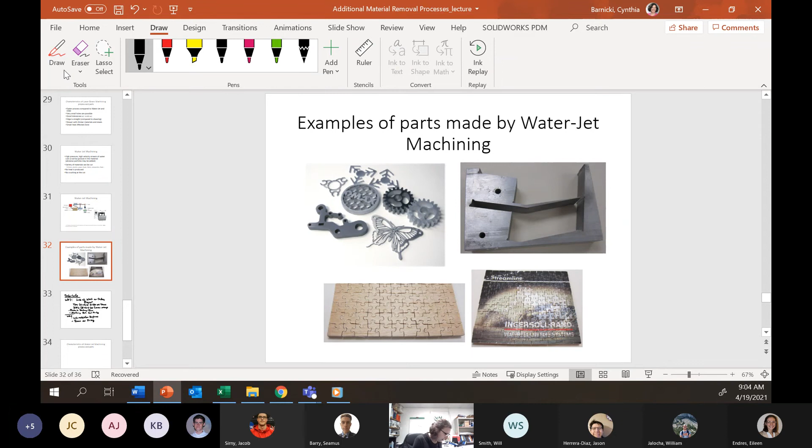So we're going to go back to our alternative machining or material removal processes. I did put the entire video that we're watching clips from into Canvas with the times that are useful; there are some other processes that you might find interesting as well.

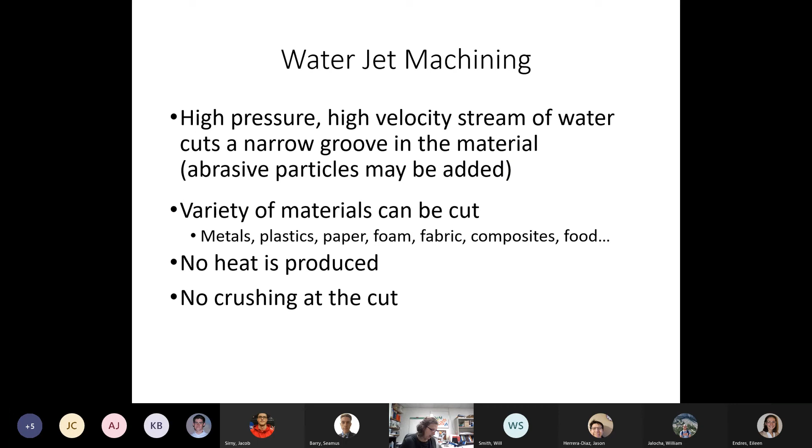On Friday, we were talking about water jet. In water jet, the machining and material removal is coming from a high pressure, high velocity stream of water. We talked about some of the advantages or characteristics and a little bit on the units themselves, and I think this is where we were when we finished on Friday.

Again, you can see that we have a lot of intricate parts possible. Here is a puzzle made of paper, and the velocity is high enough, the stream is tight enough, that you can actually do paper and cardboard in water jet without issue. So you can see how thin we have it.

I do want to introduce a new word, and that is kerf. When we talk about kerf, this basically is, in material removal, the thickness of material removed.

And sometimes we also refer to that as the material itself that's removed. So if there's a statement that says water jet has low kerf, what we're talking about is this material that ends up getting removed. So we might also say that rough milling has a large kerf. So kerf is something that we do tend to see in these material removal processes.

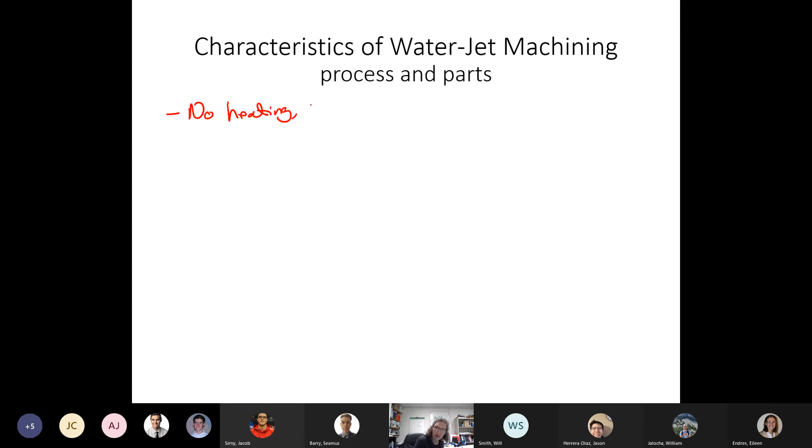But in terms of the overall characteristics of water jet machined parts, one of the big ones is no heating. So there is no heat affected zone. So we don't have to worry about any changes in material property due to heating.

Now, if we look at the surface roughness, we're in the 8 to 32 microinches. And I'm just going to note here, EDM and laser can do better. So water jet gives us a surface that is good compared to some others, but EDM and laser actually do a little bit of a better job than that.

And again, if we look at feed rate, this is going to be moderate on the feed rate. It is going to be faster than EDM and slower than laser. And sometimes in the video, we can pick up different feed rates. Any feed rate will depend on thickness and material. So our metals are going to be a slower feed rate, but water jet's on the moderate end.

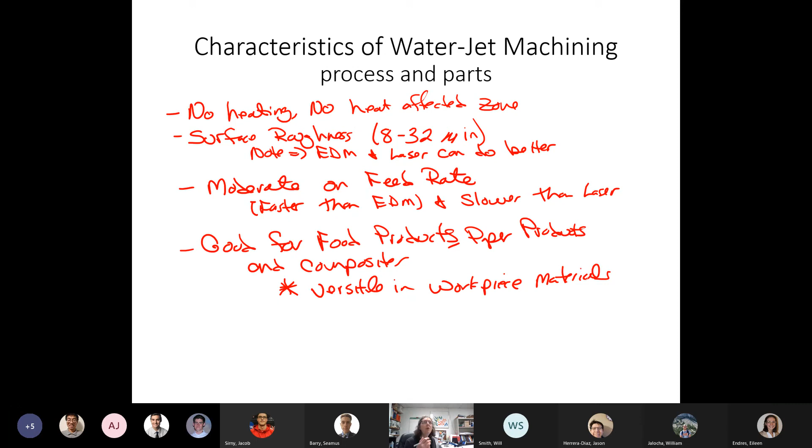And then in terms of the actual machine costs, the machine costs are fairly good here. We don't have dedicated tooling; it's computer controlled for the shape. And what this means is a single part is possible. And again, that makes it nice for custom parts.

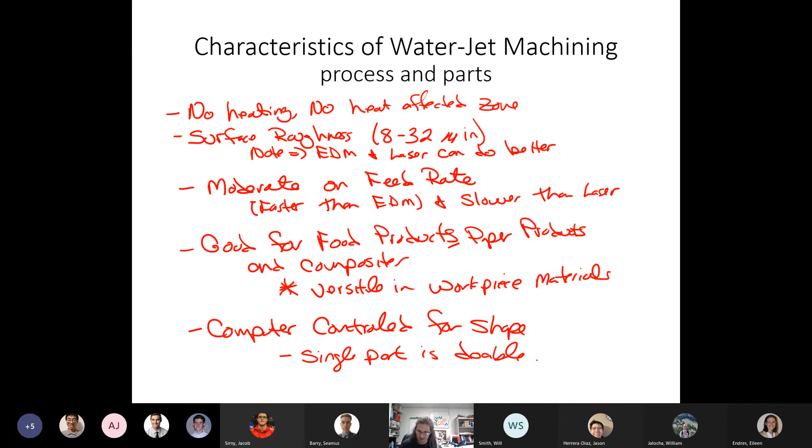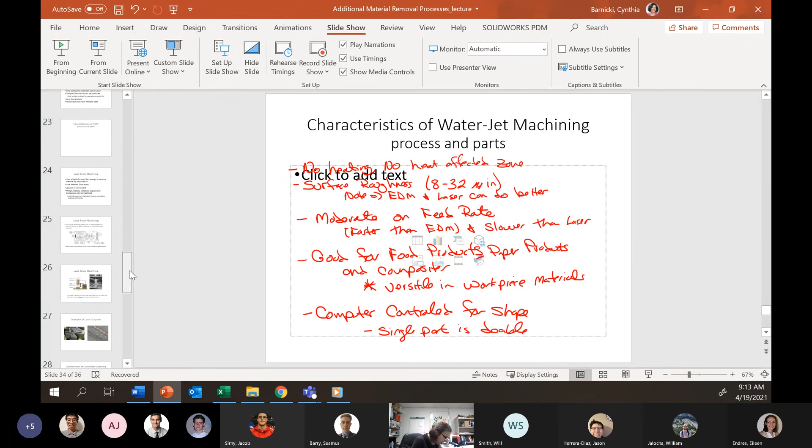Okay, that actually is what I wanted to talk about in terms of water jet. I am again going in the opposite direction of how I had set this up. On my notes, we're actually going backwards. So we're going to next talk about laser. And I want us to look a little bit at a video, but after we go through a few of the slides. Laser beam machining is probably one that has more market share. You're likely to encounter laser cutting or laser beam machining.

Really, I am not aware that there's a big difference between the terms laser beam machining, sometimes called LBM, or laser cutting. Again, a terminology issue here. Lasers are becoming more and more used. Now, we are going to use a highly focused light energy to remove material by vaporization. And oftentimes the CO2 laser is the common form.

Now, we are looking at thermal energy to remove the material. So we do have a heat affected zone. The size of the heat affected zone is very dependent on the size of the beam, so to speak, that's causing the vaporization and heating. So it is going to be small because we have a very concentrated energy, and generally it's not going to be there as long.

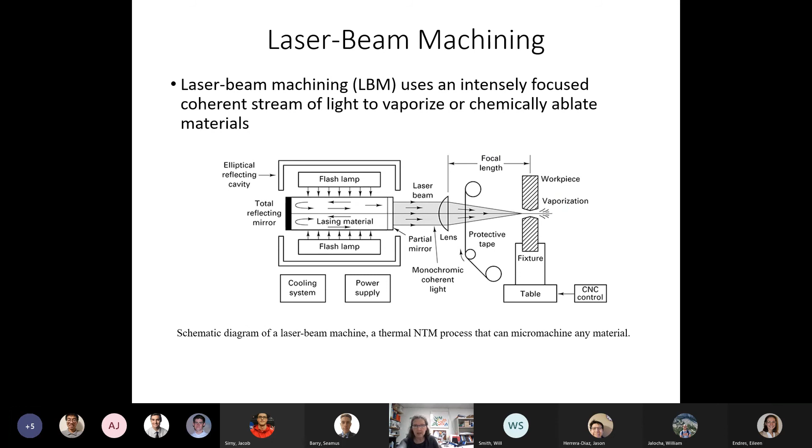Okay, again, we're just looking at we have our laser, we have our workpiece. We do have a little bit of distance between the tip of the laser and the workpiece. It is all CNC controlled. So again, we have that coherent stream of light to vaporize or just chemically ablate the material. Okay.

I am going to move to, let's look at a little bit of the video clip on this, and I am unsharing so that when I do go back and share, I can include the sound.

And we're going to see a little bit of the end of the water jet, but we will again look at laser, look at the materials, listen for anything about tolerance or anything about feed rates as well. So let's give laser a go.

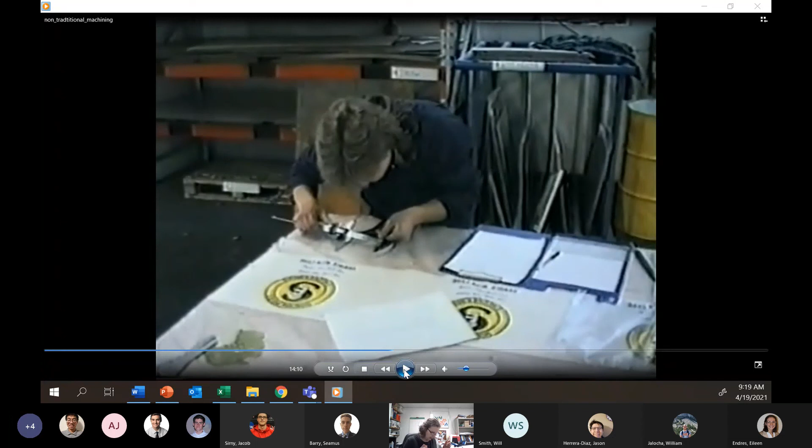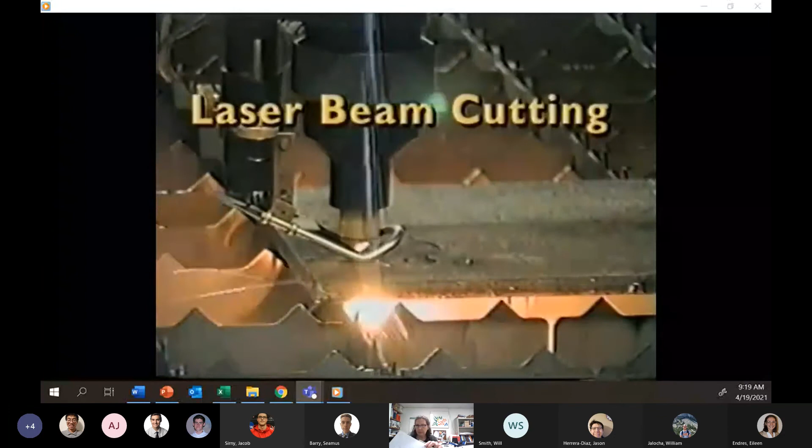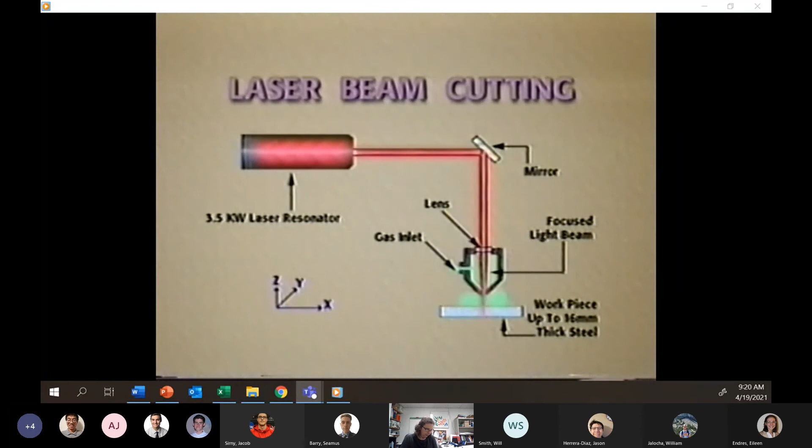And here we go. Tolerance on the spanner is plus or minus 0.2 of a millimeter, and the edges must be square. Laser generators have a capacity of 1 to 3.5 kilowatts, and this energy is focused on a spot having a diameter of 0.2 of a millimeter. A 2 kilowatt generator will cut 12 millimeters mild steel at 1100 millimeters per minute using oxygen as an assist gas. For cutting stainless steel and aluminium alloys, high pressure nitrogen is used. This is called clean cut. Non-metals use compressed air. Laser cutting allows a new flexibility in design, as shapes that were previously considered impossible can now be cut.

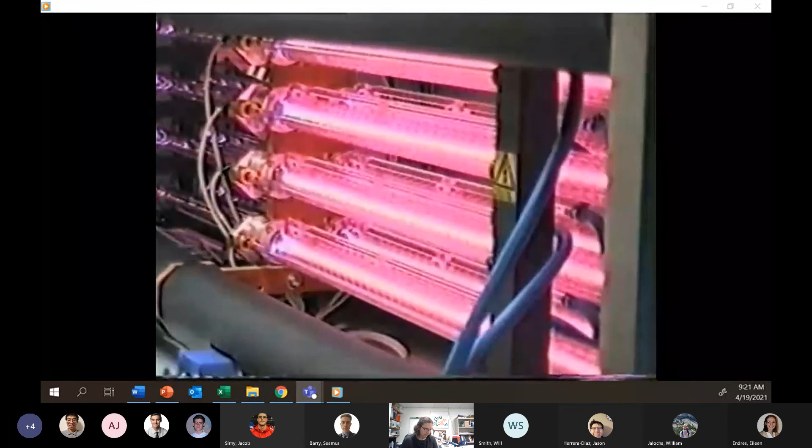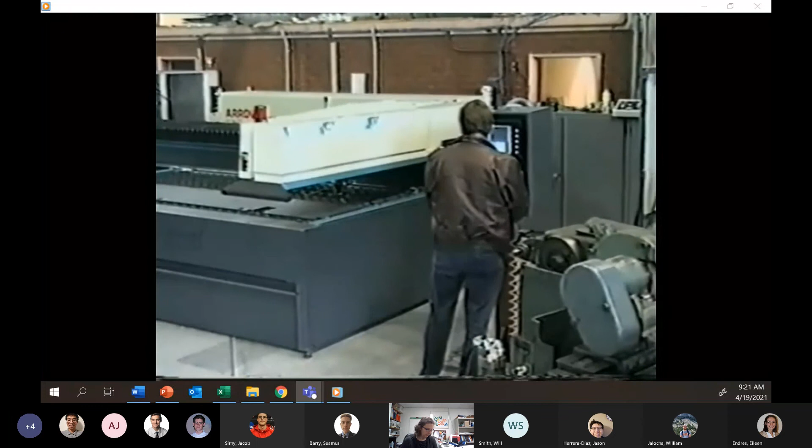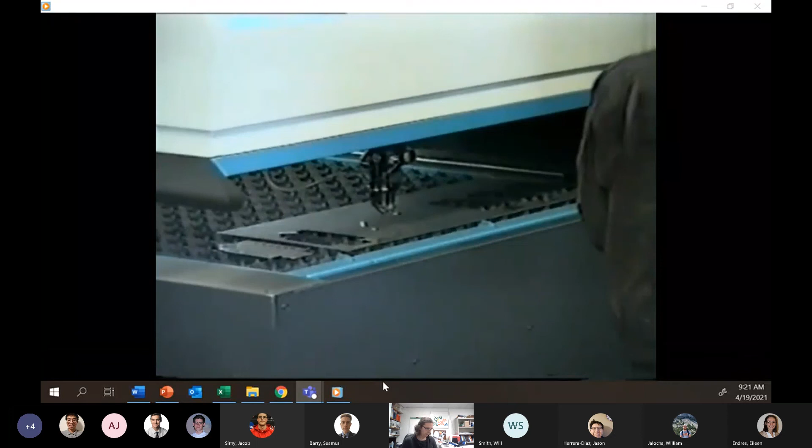This industrial CO2 3.5 kilowatt laser generator produces enough power to cut 2.5 millimeter stainless steel at a feed rate of 2 meters per minute. The laser beam from the generator is reflected via a series of mirrors to the cutting head. These mirrors must compensate for the cutting head movement, a very complicated task when 3D laser cutting is performed. The Laser Lab profile machine has two tables, 3 meters by 1.5 meters, that pass under and over each other, allowing one table to be unloaded and then reloaded, while material is being cut on the other table, giving an improvement in machine productivity of up to 50%.

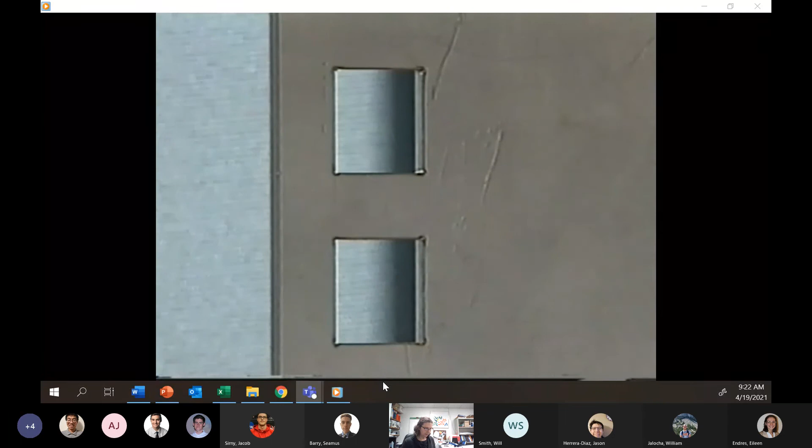With 2,500 kilopascals of high-pressure nitrogen, clean cut, tolerances of plus or minus 0.1 of a millimeter can easily be maintained over the shape. The cut width is less than 0.2 of a millimeter. The complete shape is cut out in 1 minute 38 seconds. The edges are clean, square and smooth. This process is ideal for medium-sized production runs where the cost of a die set would be prohibitive. It is also perfectly suited for just-in-time requirements, where small batch sizes are required, as changes from one material to another can be accomplished within 1 to 2 minutes.

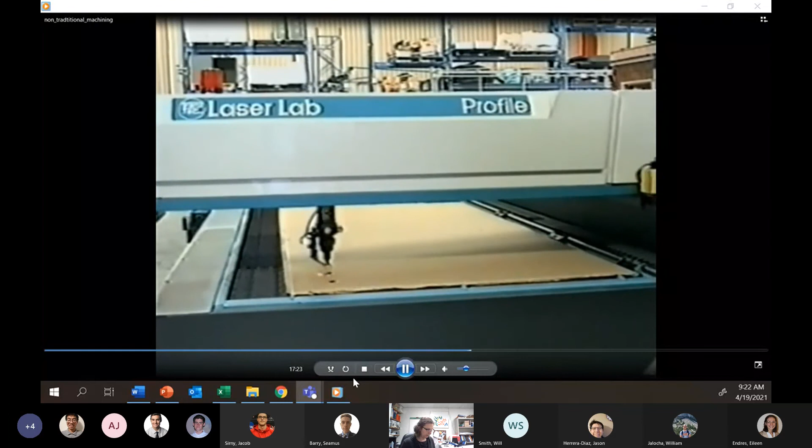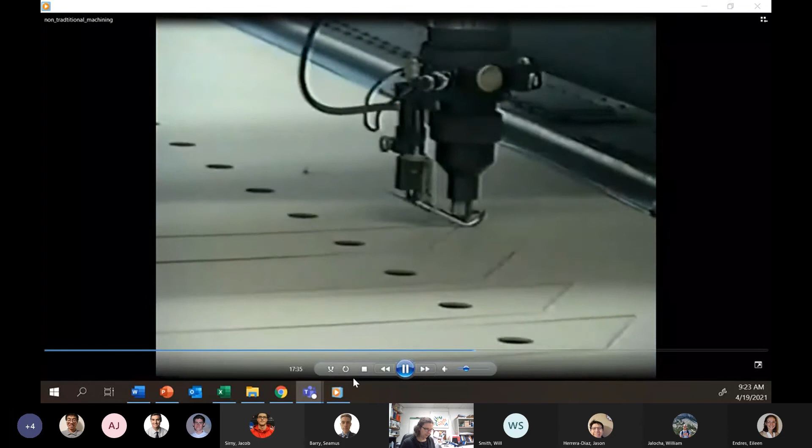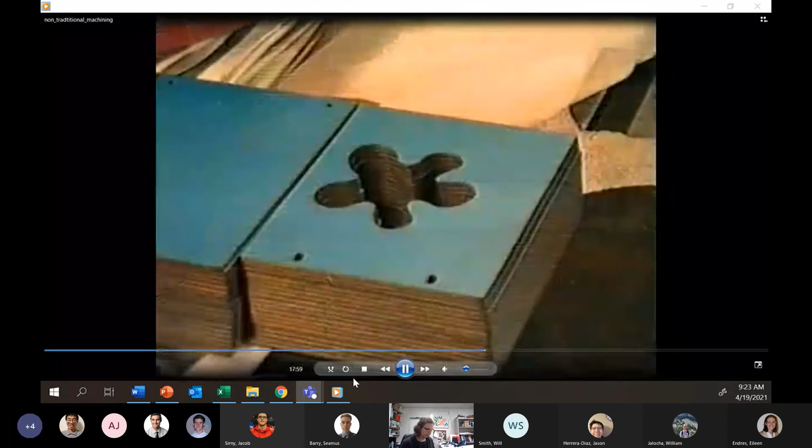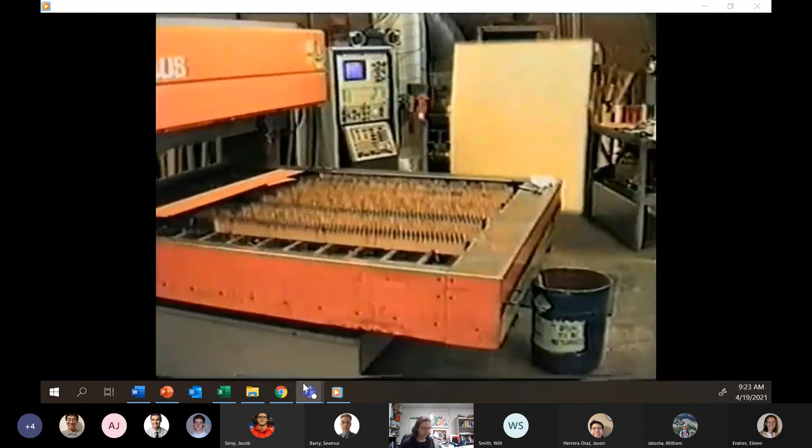The program for cutting this acrylic sheet has been downloaded from a CAD station, or could have been imported from a customer's data file into the sophisticated CNC controller of the Laser Lab profile machine. The feed rate for cutting this 3mm acrylic sheet is 20 meters per minute. When cutting acrylic sheet, compressed air is used with the laser to remove vaporized material from the cut. All 14 shapes are cut out in under 3 minutes. Using compressed air, wood, fabrics, plastics and foams, provided they do not give off noxious fumes during the process, can be easily cut, non-ferrous alloys being more difficult. In this case, a pre-painted plywood is cut into a number of shapes that have been carefully designed and nested to give a maximum number of units per sheet.

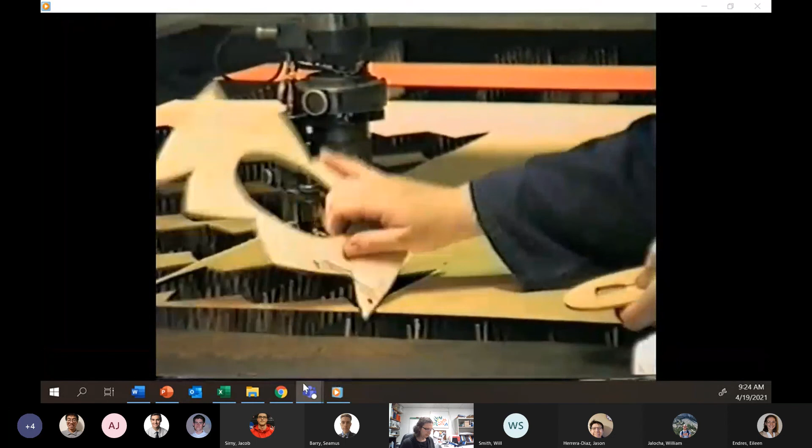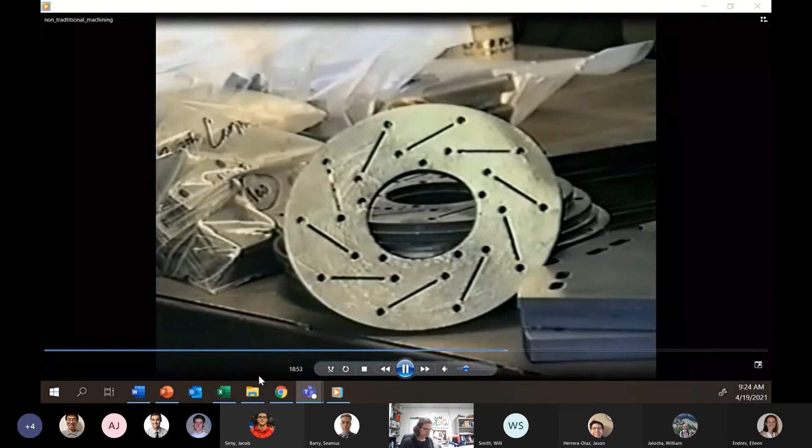Whether it is a small production run of 10mm steel plates, one component of complex shape required for prototyping, or runs of a few thousand, then laser cutting should be considered.

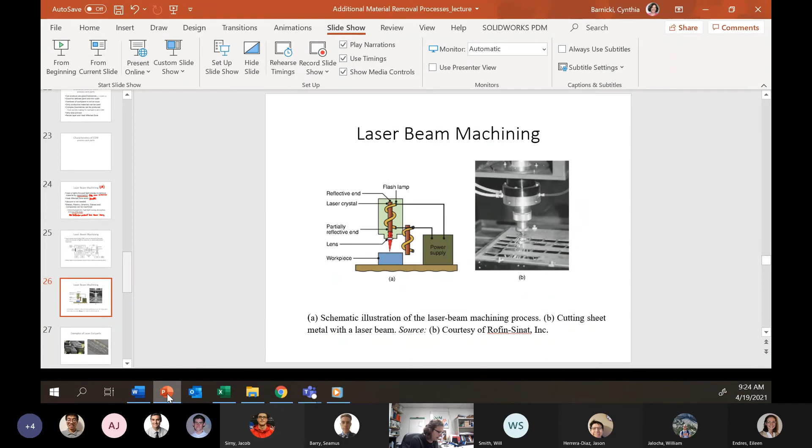Okay, so that is fun with laser cutting. And one of the things that you may have noticed compared to the water jet is how fast that laser cutting is going. I know it's kind of hard to remember what those speed rates were on the other ones, but the head just moves much faster. You may have noticed that it does go faster with the acrylic than it did with the steel. But laser is going to have a much faster feed rate compared to water jet.

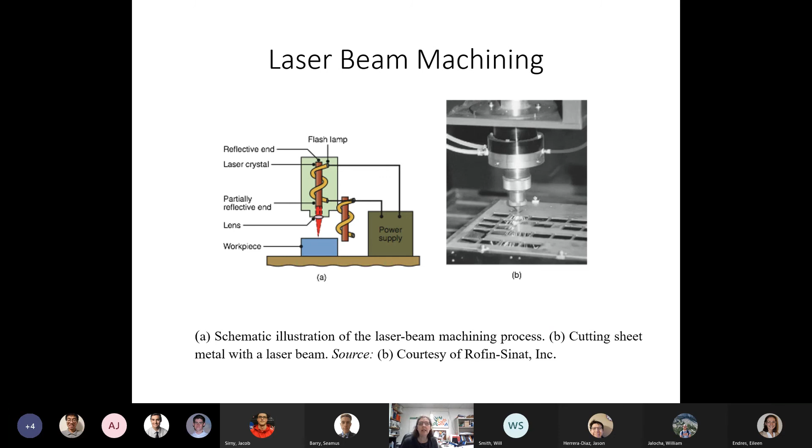Sometimes I often ask myself, like, why are you making those particular parts? But you did get an idea of the various materials.

So let's go back and look at our characteristics, and I realized that I was missing one on water jet, so we'll go back and pick that one up. One of the first things is it is faster, meaning higher feed rate, than both EDM and water jet. Very small holes are possible. That prototype part that had a number of holes and some slits was a very effective part for laser cutting.

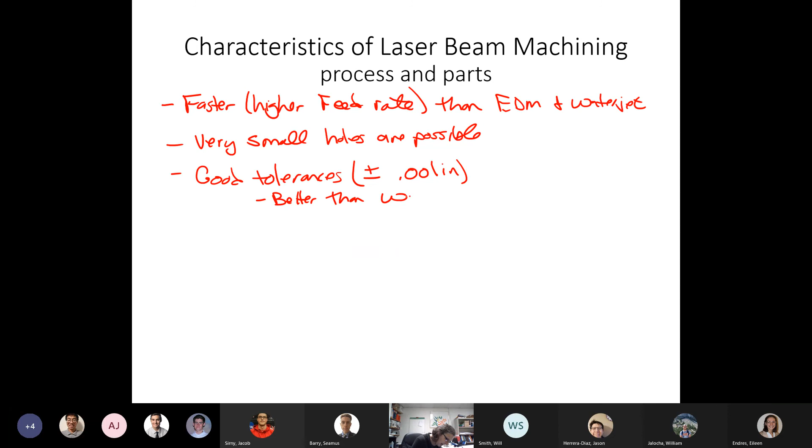We have good tolerances, and tolerances is what I forgot to put with water jet: plus or minus 0.001 inch. So it is better than water jet, which tends to be plus or minus 0.003 inches, but not as good as EDM. With EDM we can get down to 0.0002 inches. So good tolerances are available, but not quite as good as what we can get with EDM.

Nice thing is the edge is straight, especially compared to shearing. Remember, in shearing we do not get a straight edge, but in laser we do. It is going to have a small heat affected zone. It is slower with thicker materials and steel.

And then highly reflective materials can be an issue, because if the material reflects too much, you're not going to be able to cut. You need the material to be able to absorb the energy in order for it to cut. But laser is an awesome process, and it is likely to be one that you're going to see quite a bit. It is also CNC, so we can do a small batch as well. So laser, again, very, very good process.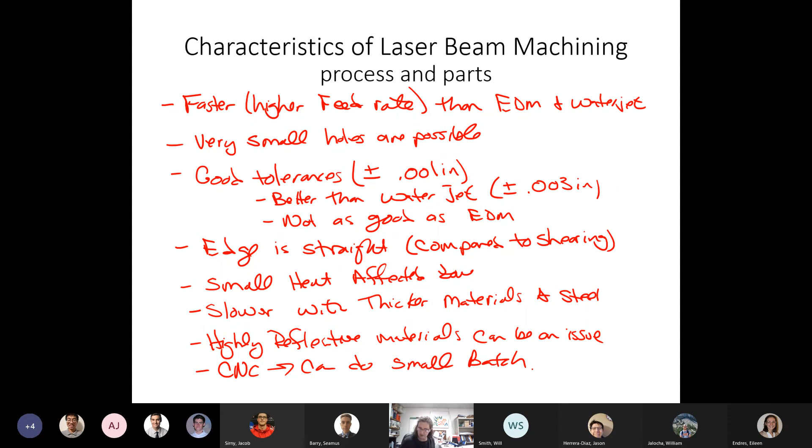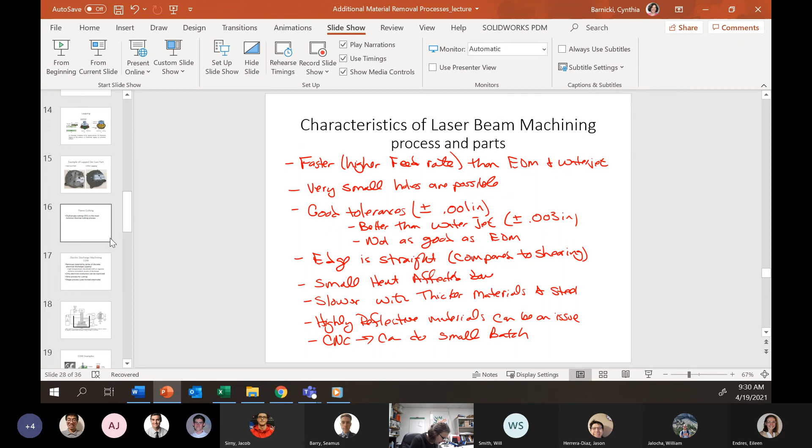Okay. The last one I want to look at is EDM, so let's give that one a go. EDM is electric discharge machining. In EDM, this is going to be a vaporizing kind of process. It is more of a thermal process, but it works in a different way than lasers. We're removing the material by a series of discrete electrical discharges or sparks.

So we will have an electrode. We have an electrical circuit, with the anode and the cathode. We get very high, localized temperatures, and you melt or vaporize the material in the immediate vicinity of the discharge. It is a process that actually works very well for hard materials. Now, we do have to have a conductor, so it is a process that is limited to electrical conductors, so pretty much metals.

There is a wire process for cutting, sometimes referred to as wire EDM, and with the wire process we can do a small quantity or one. With the shape process, because we have an electrode, we oftentimes like to have a little bit of a higher quantity.

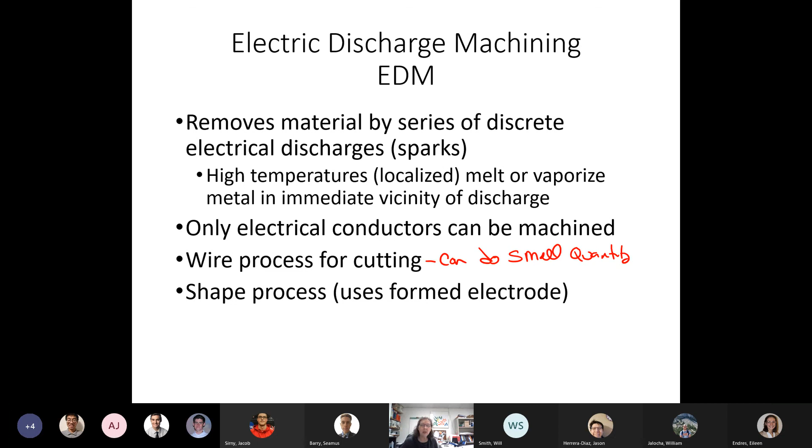Okay, so let's look at this and do the same thing. We'll talk about it a little bit, and then we'll look at the video to help us out a little more. An EDM machine is somewhat dedicated. It's not as complex as we might see in other fields, but we do need to have a dielectric fluid.

We do need to have the ability to connect a circuit. The tool is the electrode, and it's the opposite of what we're trying to create. We drive the tool into the workpiece, and in the gap we get a spark that melts and vaporizes the material. We're basically moving the electrode into the workpiece and vaporizing it.

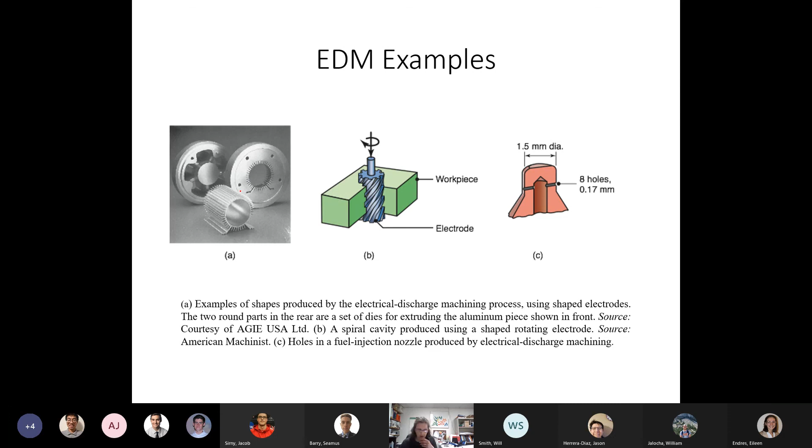Here's the electrode, and that's exactly the opposite shape of what we would produce. Here are some parts that have been EDM'd. Here's another example of an electrode, and then the part or shape it would produce.

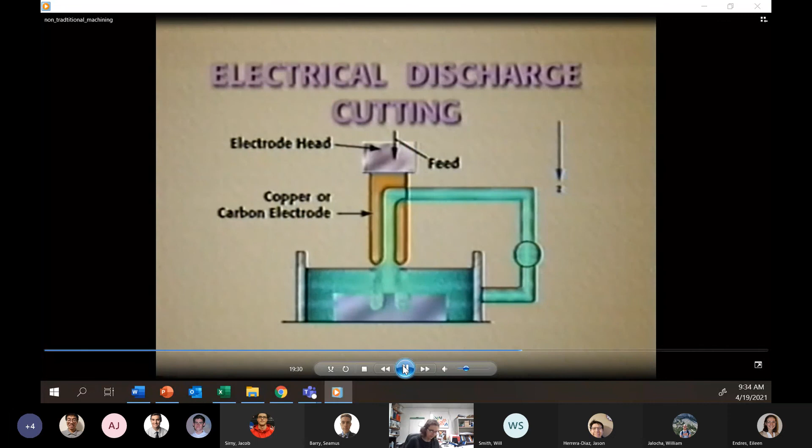With electrical discharge machining, the electrode is made out of copper or graphite and is the male shape of the hole to be cut. About 1% of the electrode is lost during the cutting process. The electrode sparks its way into the workpiece in the Z-axis. The workpiece is in a dielectric fluid that controls the spark conditions and also flushes debris from the cut area. Central flushing of the electrode is a common practice.

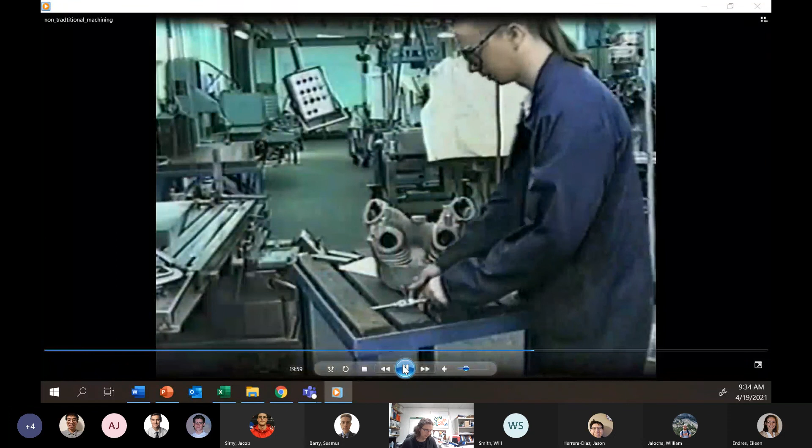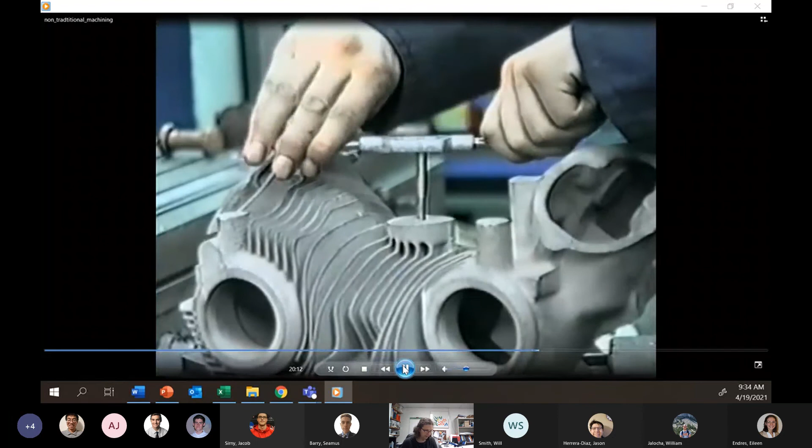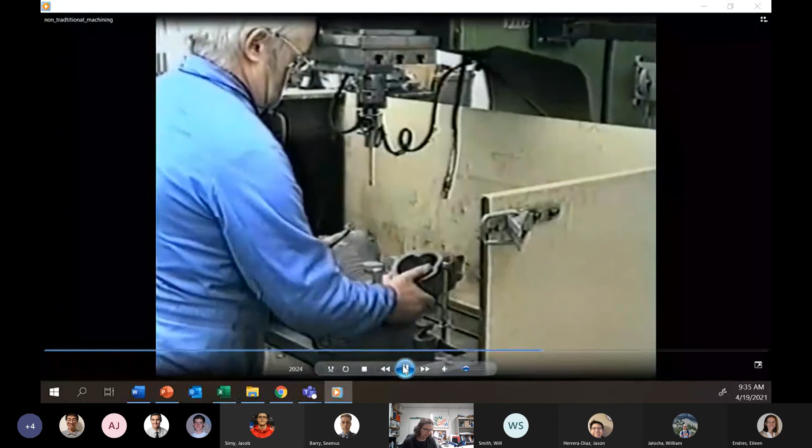A broken tap. It is very difficult to remove a broken tap from aluminium, as there is a large difference in hardness between the two materials. To solve this problem, a process was developed in the 1950s called spark erosion.

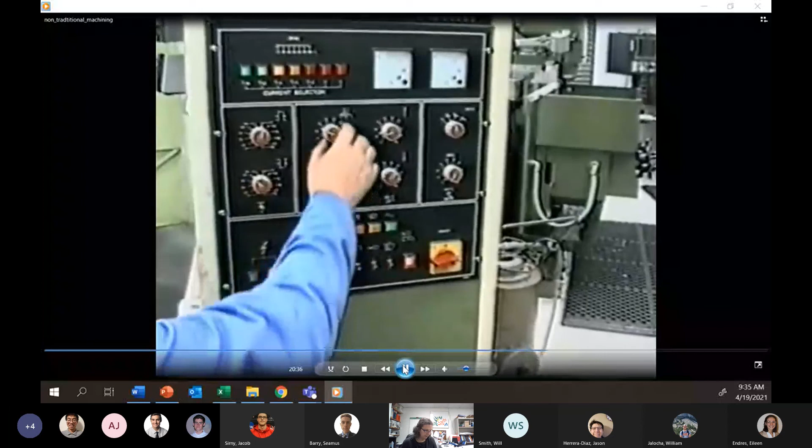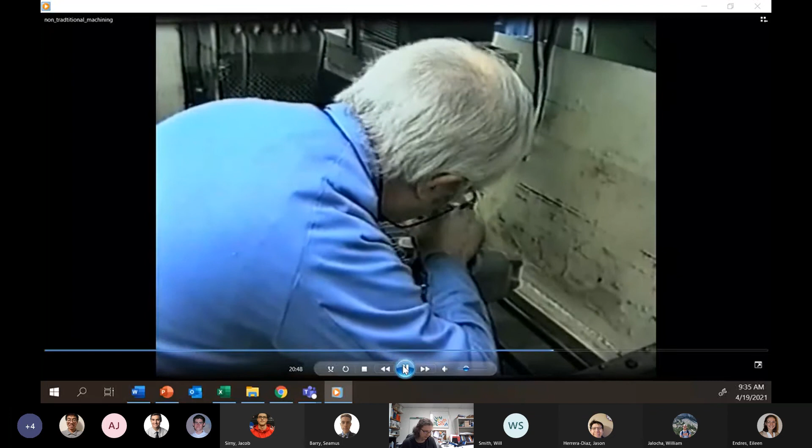The power supplied to this electrode is 50 volts at 12 amps. Preliminary settings of the machine's spark control are made. Modern machines can automatically vary the power supplied as the area of the electrode changes during its cut. The electrode is lowered and then carefully aligned.

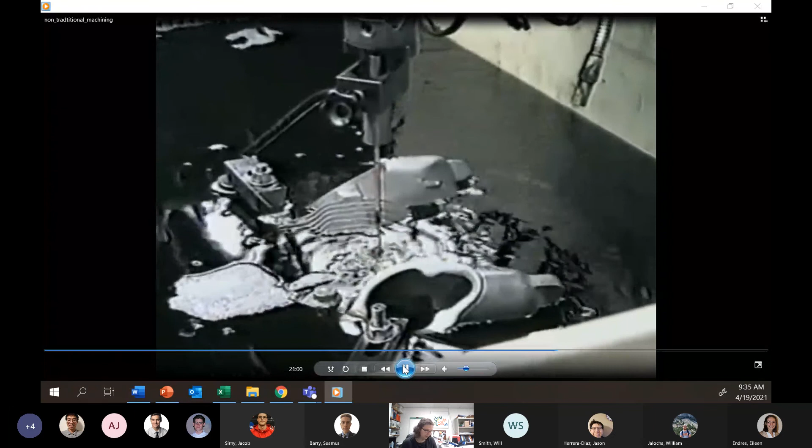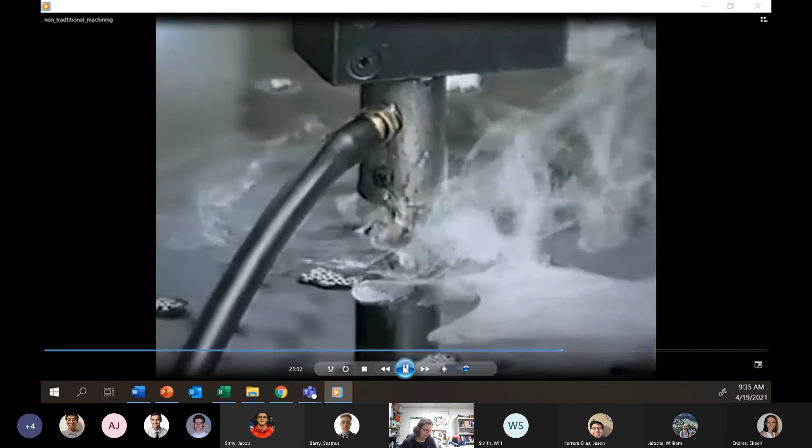The tank is filled with a dielectric light oil, some of which is being pumped out of the center of the electrode. This will later act as a flushing agent. Final adjustment is made to the controls to optimize cutting conditions. The broken tap is being machined away without damaging the surrounding material.

After the tank has been drained, the remnant of the tap is removed.

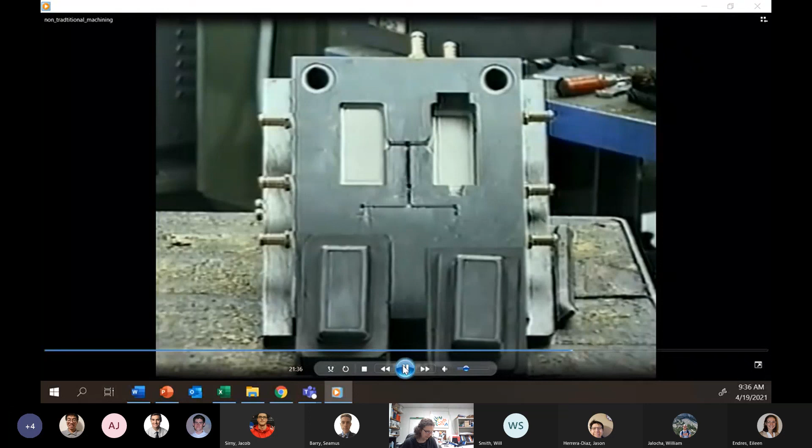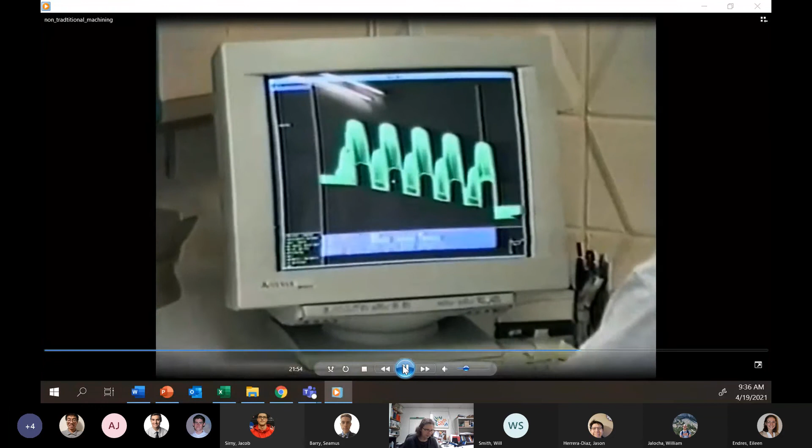The cavity in the die was cut using the graphite electrodes below. A new electrode is required for every new shape that is to be cut. With the advent of CAD workstations and CNC machining centres, very intricate and complex shapes can now be machined.

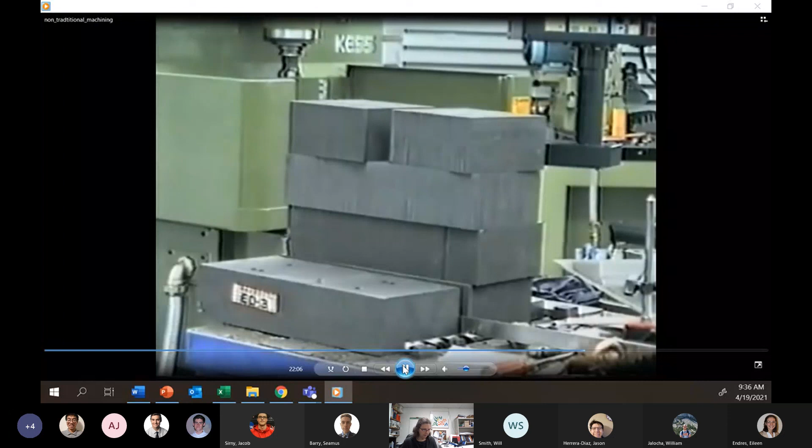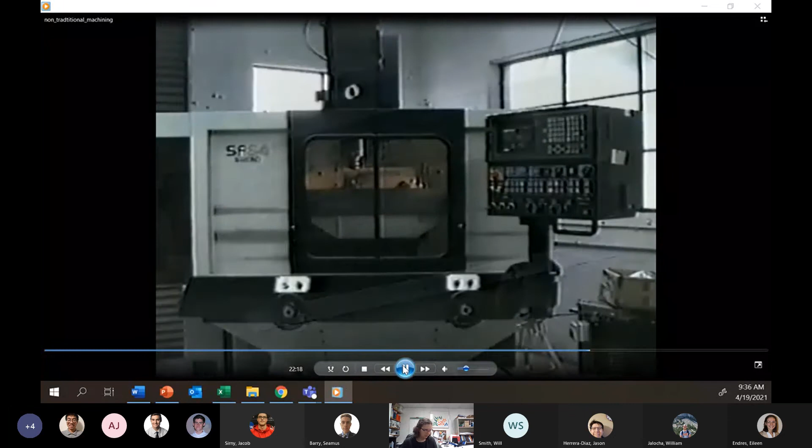The quality and cost of these graphite blocks varies greatly. The grade selected is dependent on whether a roughing cut or finishing cut is to be made and the rate of electrode loss that can be tolerated during the electro-machining process. The electrode shapes are produced using CNC machining centres having 3D capabilities.

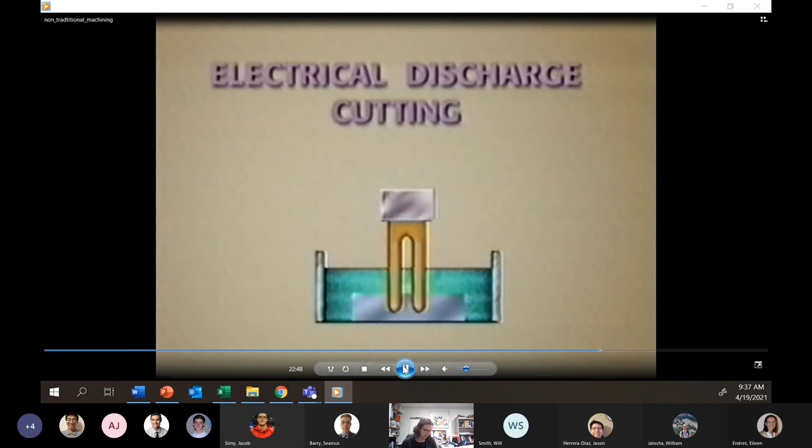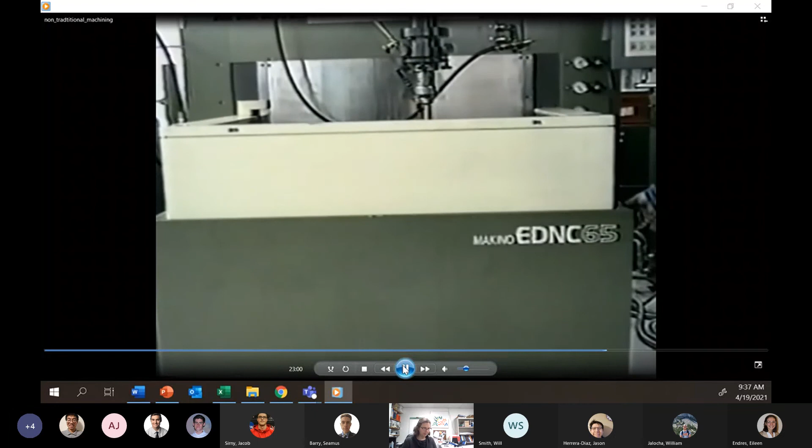A new method of flushing out the debris from the machining process is to move the electrode away from the work and then down again. Resume machining for a few seconds and then move the electrode away again. This causes a very efficient flushing of the surfaces, leading to an increase in the cutting rate and a decrease in the rate of electrode loss, and hence better shape definition.

The electrode can be rotated like a milling cutter, and the CNC controller moves the electrode around the shape to be machined. This gives rise to improved surface finish.

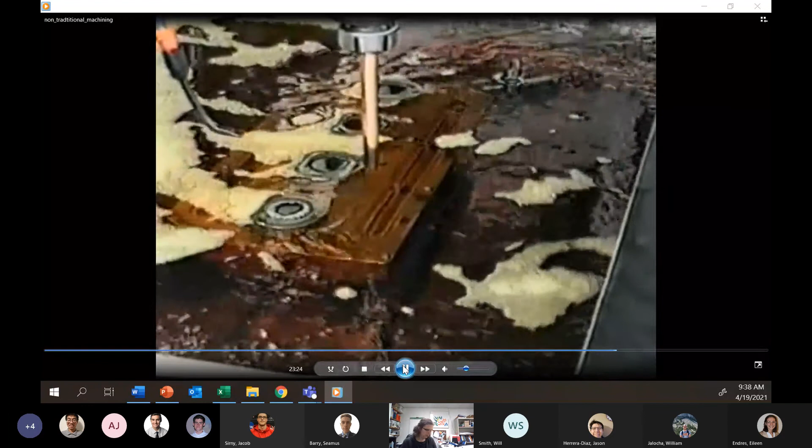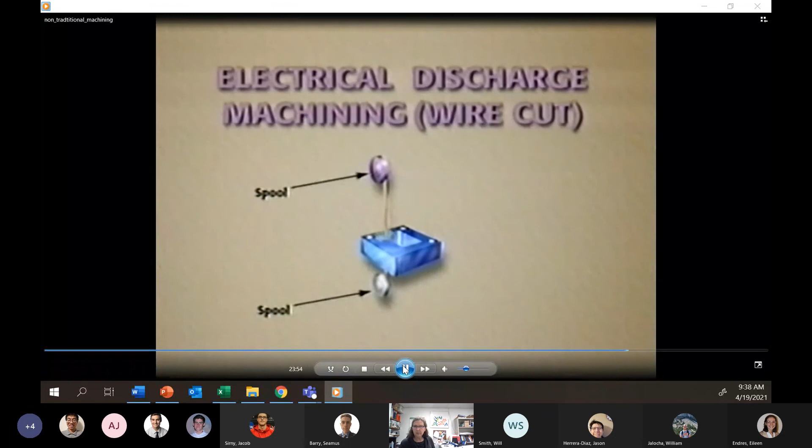Wire cut is a form of electrical discharge machining that is ideal for the cutting of precise shapes from previously hardened and tempered blocks of steel, at the same time producing a fine surface finish, thus making the completed die shape require no further heat treatment with its inherent possibility of distortion. The process is ideal for the production of extrusion dies and die sets.

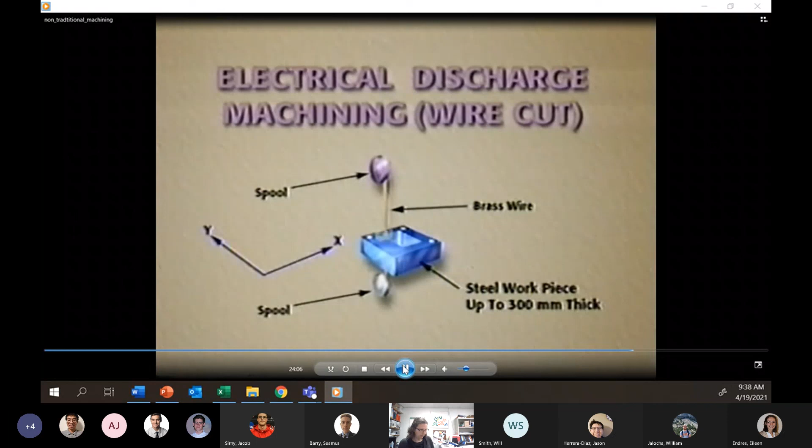The brass wire threads through the work at 180 millimeters per second, and the feed rate for a 10 millimeter thick steel plate would be 8 millimeters per minute. The work moves in the XY direction relative to the wire.

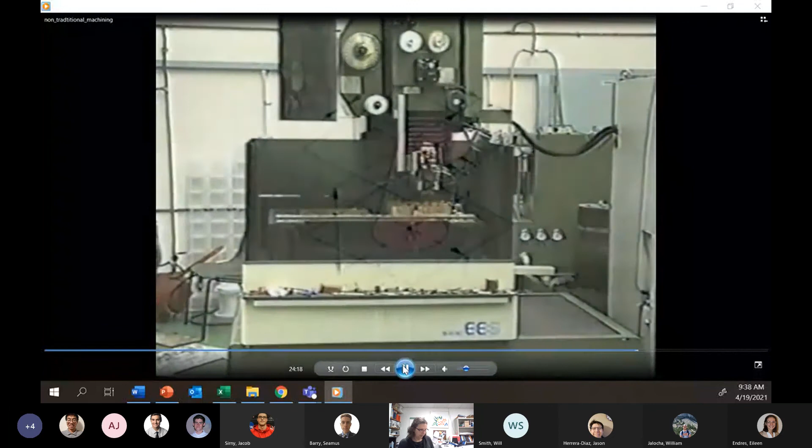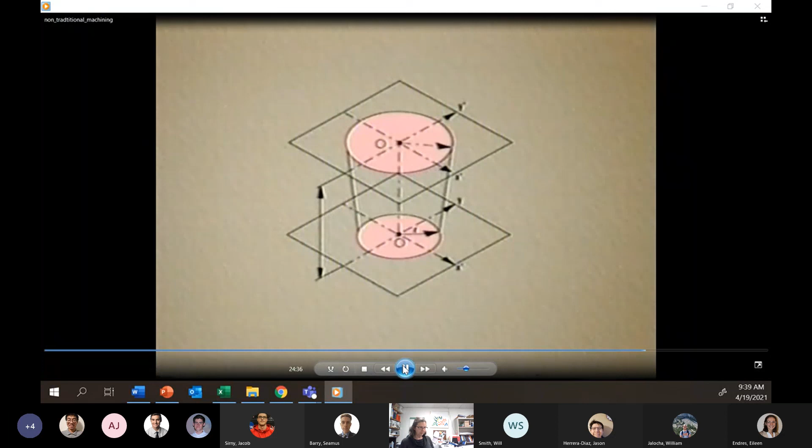With CNC controllers, it is possible to angle the wire so as to offset the top shape from the bottom shape, or rotate the top shape relative to the bottom shape, or scale the top shape to the bottom shape. This is particularly advantageous when making a punch and die, as the larger top face of the punch can be made to fit the smaller hole on the bottom, thus making the punch and die from the same piece of metal.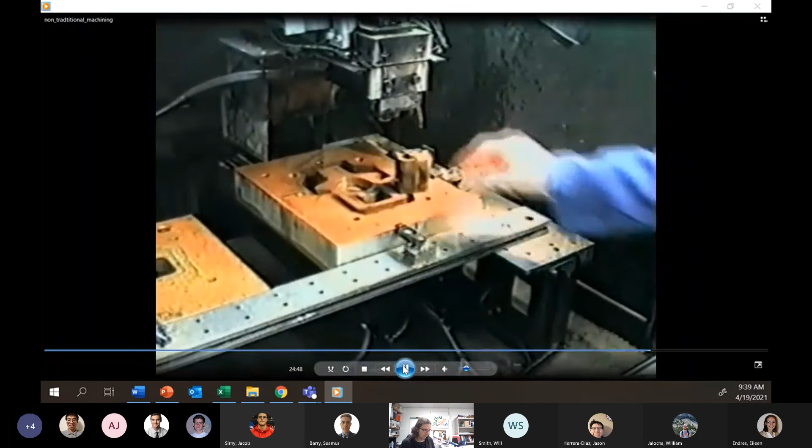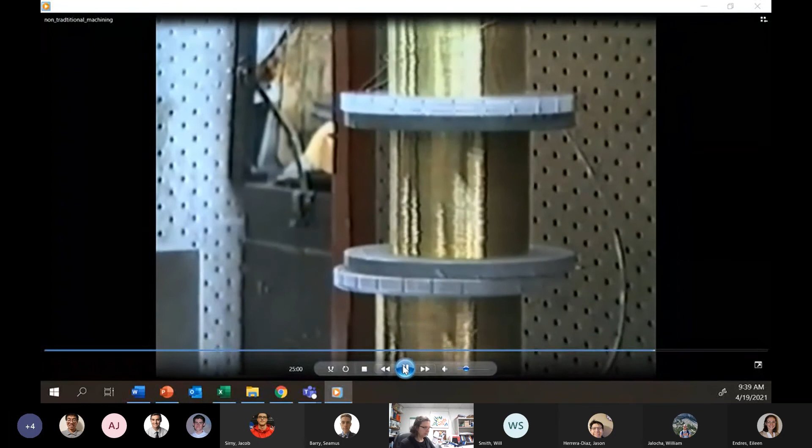The shapes that can be produced are limitless. The brass wire that is used has a diameter of 0.25 of a millimeter and is only used once, it then being sold for scrap.

The wire cut machine is threaded up like a sewing machine. To get the wire through a previously drilled hole in the work, a small jet of high pressure water is used to guide the wire through the work and thread the rest of the machine.

A large column of deionized water is used to surround the wire. The head is lowered and cutting proceeds.

This stack of 30 galvanized iron sheets is being cut so that the sheets can be used in a pilot run to establish that the shape is correct for the final forming of the product. The same program can later be used for cutting the punch and the die.

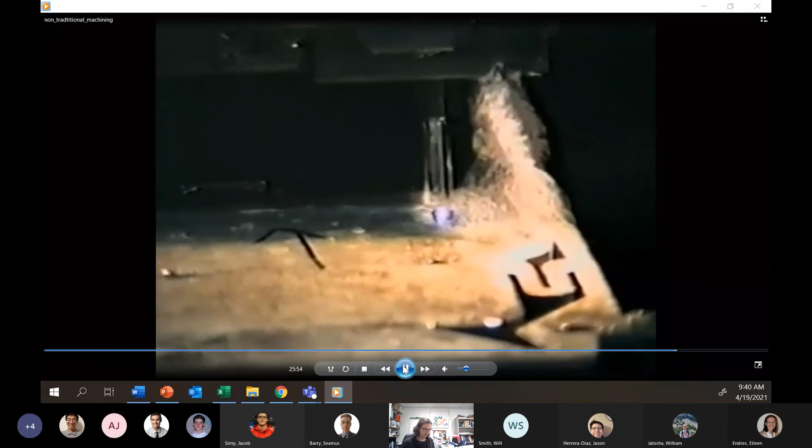Okay, there we go. So I do, again, like some of the examples to allow you to see what's going on.

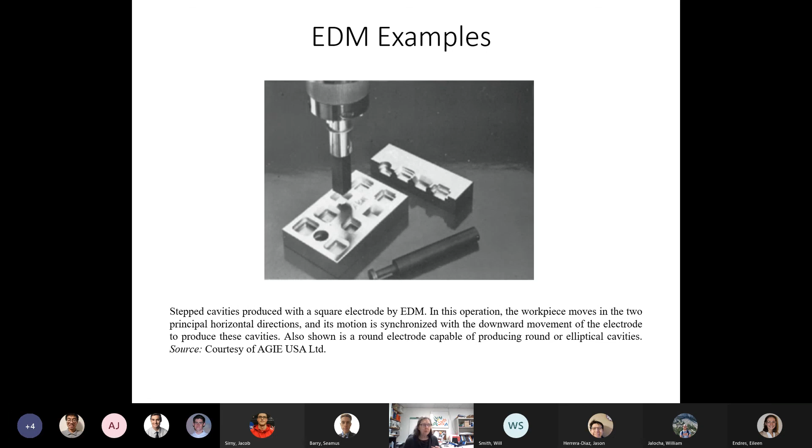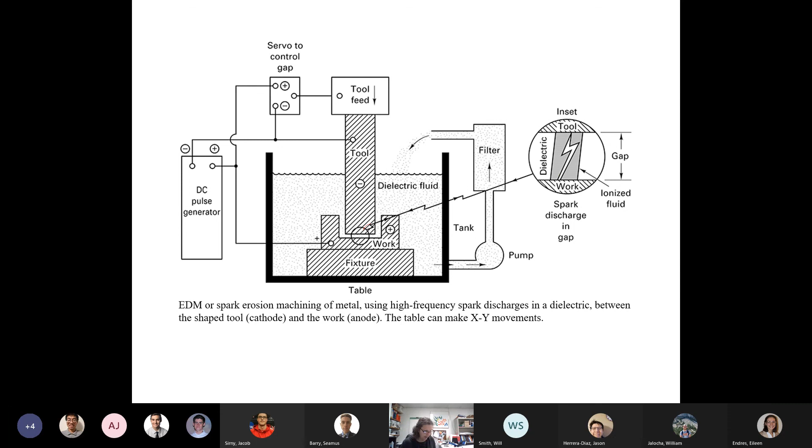So again, what we're doing, whether it's wire EDM or standard shape or sinking EDM, is generating a spark between the electrode, which is either the shape we're interested in that we're plunging into the workpiece, or it's the wire, and there's always that dielectric fluid around it. So we are generating that spark. If we look at the wire process, the wire is acting as our electrode, and we're just moving that wire through the material.

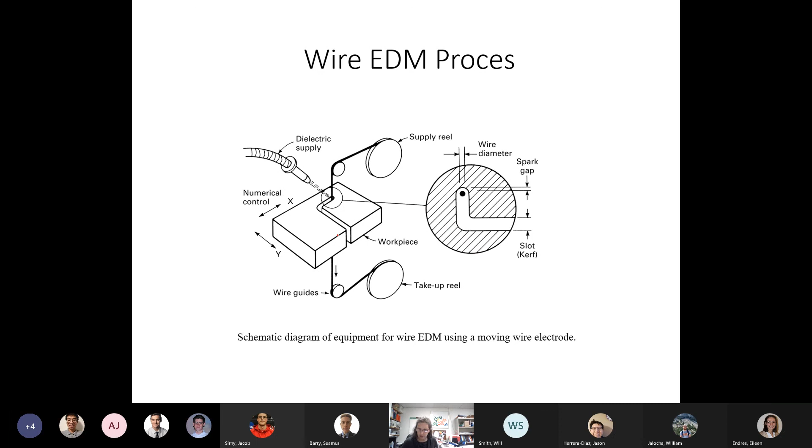Wire EDM is more versatile in terms of the shapes, also because it's a computer program that's doing it. So wire EDM, I actually have a little more experience with than I do straight EDM.

Now, if we want to consider some of the characteristics, with EDM this is where we can get really good tolerances. Notice that our laser was 0.001, so we are 5 times better, we could say, in terms of tolerance.

EDM is not only useful when we want a very hard material, we can get very good tolerances. So it is also good for delicate parts and thin walls. Not to say that the other two processes aren't.

Hardness of the workpiece is not an issue. This is a process that works very well for high hardness materials, our hardened steels. We are limited to only conductive materials, so we cannot do EDM on plastics, ceramics, and many composites, unless it's a conductive composite.

We can do very complex geometries. So we noted here that you could create a prototype sheet metal, which I think is kind of interesting. So you can create your...

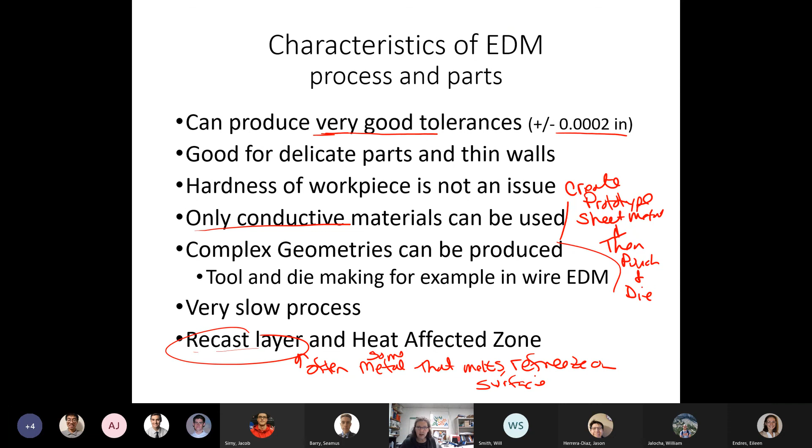Okay, so this... oh, okay. I'm like, why do I have it twice? That's right. I think I was going to write this down and then I didn't get rid of the other one.

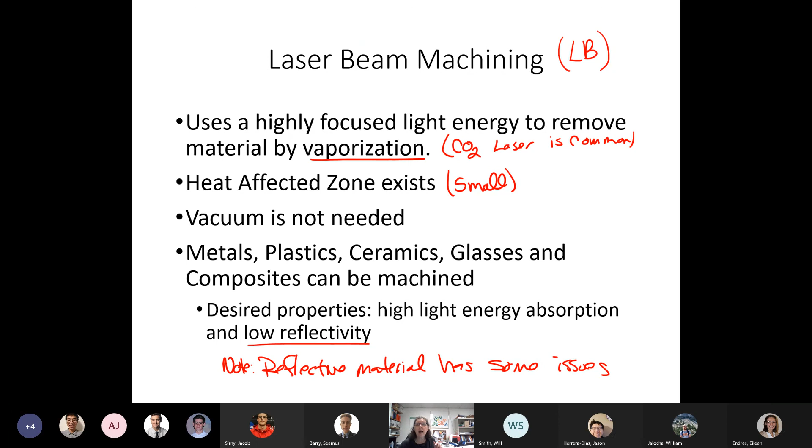Okay, so I think if we look at all of these processes, we can see again this idea of tolerance, of feed rate, of surface finish, and make a decision on what is the best process for a particular application. In all cases—I shouldn't say in all cases—but what we're really interested in for the processes we've looked at, we can't look at anything in great detail. We just want to be aware of the variables in terms of tolerance, surface, feed rate, and any restrictions that are there.